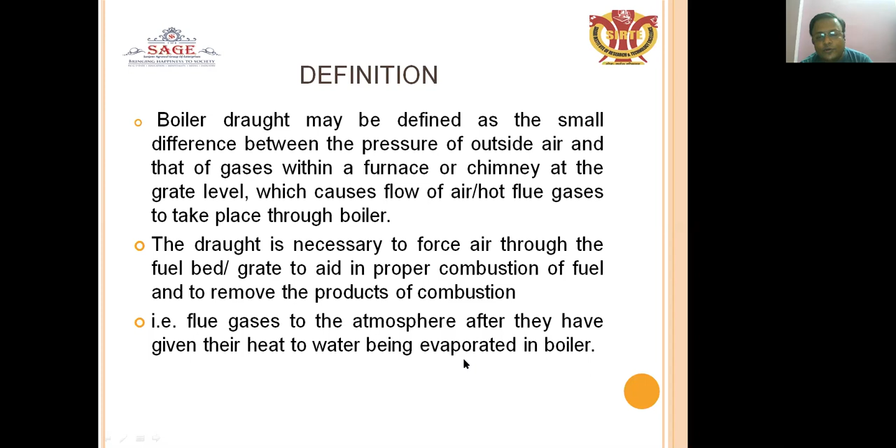Draught also provides velocity to the flue gases and increases the heat transfer coefficient in the boiler.

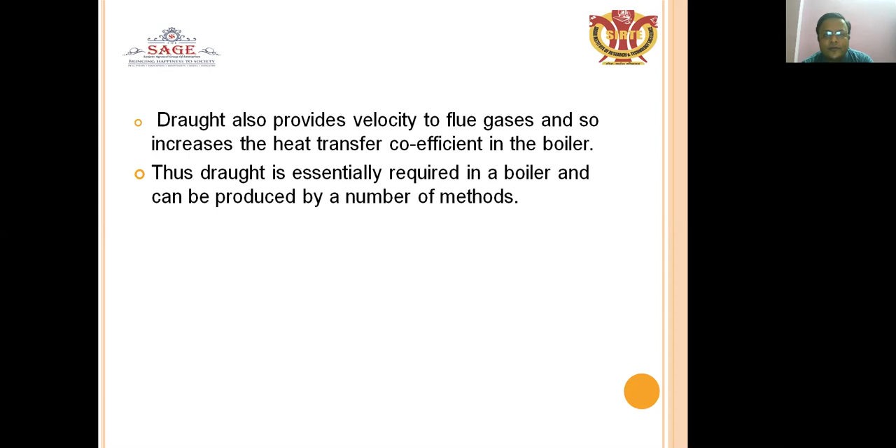Its classification is shown in a draught tree. There are basically two types. Natural draught is produced by the chimney, and artificial draught is produced by some external source. Artificial draught is further classified into steam jet draught and mechanical draught, which are used in a thermal power plant. Steam jet draught is produced by a steam jet, and mechanical draught is produced by a fan

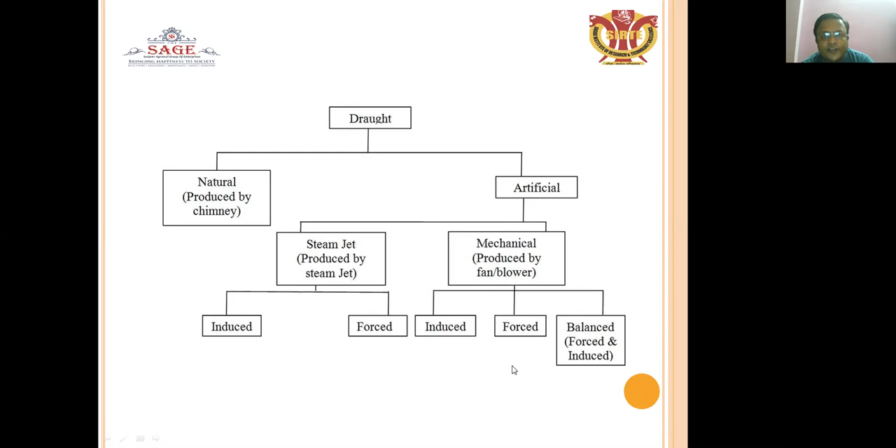or blower. The steam jet draught is divided into two categories: induced draught and forced draught. Whereas mechanical draught, produced by a fan or blower, is of three types: induced, forced, and balanced. Balanced draught is the combination of forced and induced draught. What is the meaning of natural draught?

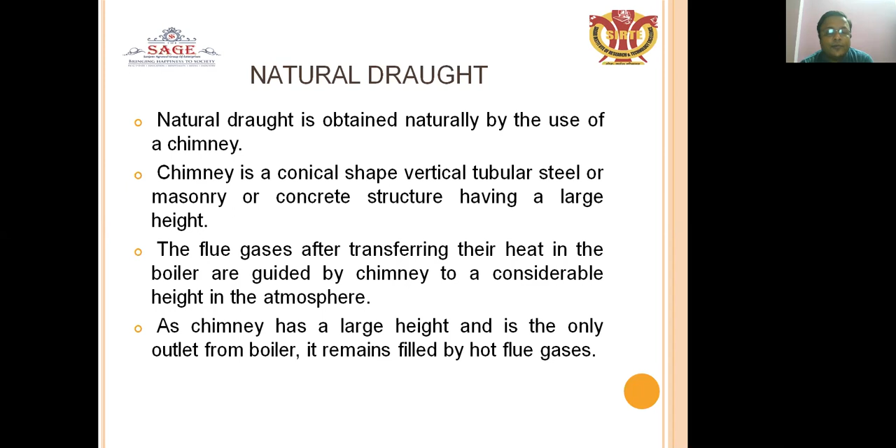So these exhaust gases, however, have given their heat to the water in the boiler are still hotter than the

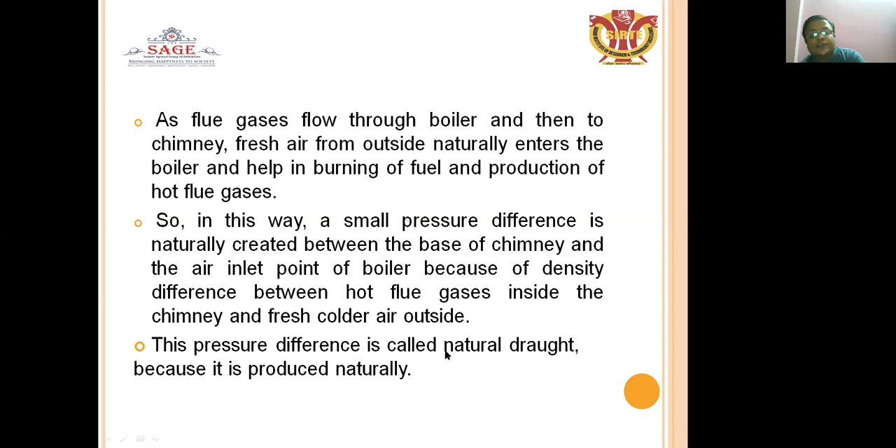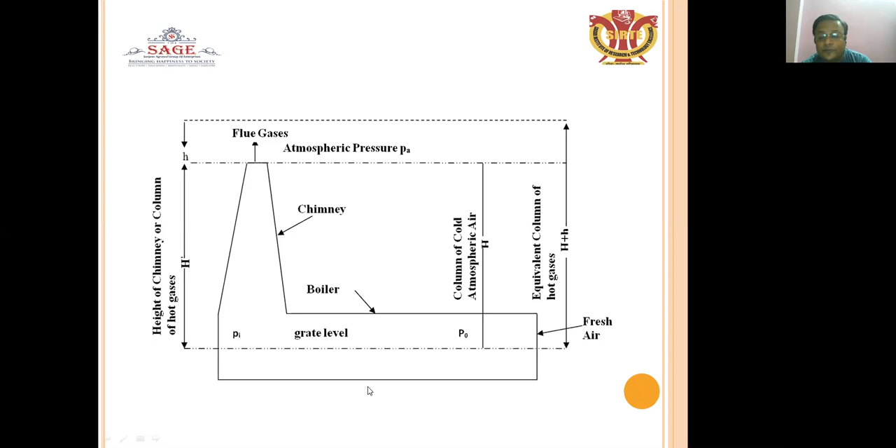Artificial draught: when the draught is not sufficient for escaping the gases from the chimney to the atmosphere, there will be a need of artificial draught, where some external force produced by a fan is required to move the gas from the chimney to the atmosphere. That is called artificial draught, in which category comes a mechanical fan or blower, or a steam jet itself.

In a modern commercial boiler, more value of the draught is required to increase the heat transfer coefficient and enhance the thermal efficiency.

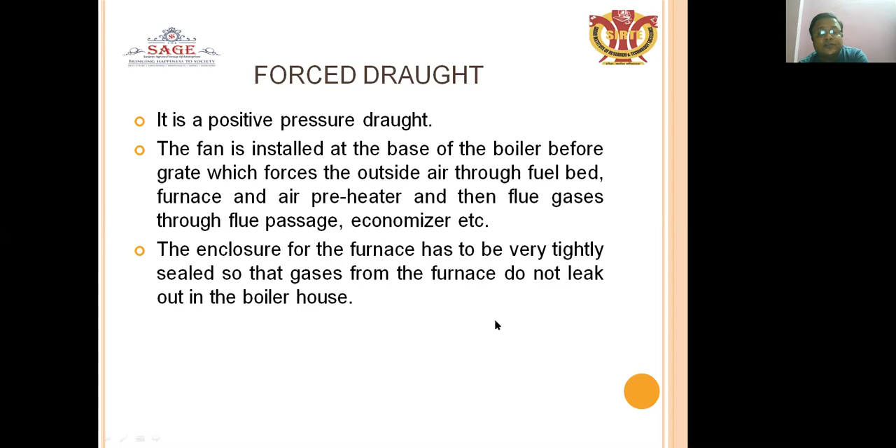So it will be helpful for the economizer also, that is the accessory of the boiler, and it will be helpful for the preheater, which helps preheat using the gases before they pass through the chimney. The enclosure for the furnace has to be very tightly sealed so that gases from the furnace do not leak into the boiler house. So this arrangement can be done by the forced draught fan.

In induced draught, in this system, the fan is installed below the chimney, or at the base of the chimney, which creates a partial vacuum in the furnace and the flue passages. For escaping of the gases, a fan will be needed because the gases carry a high amount of heat. That is the reason the gases will be lighter than the cold air.

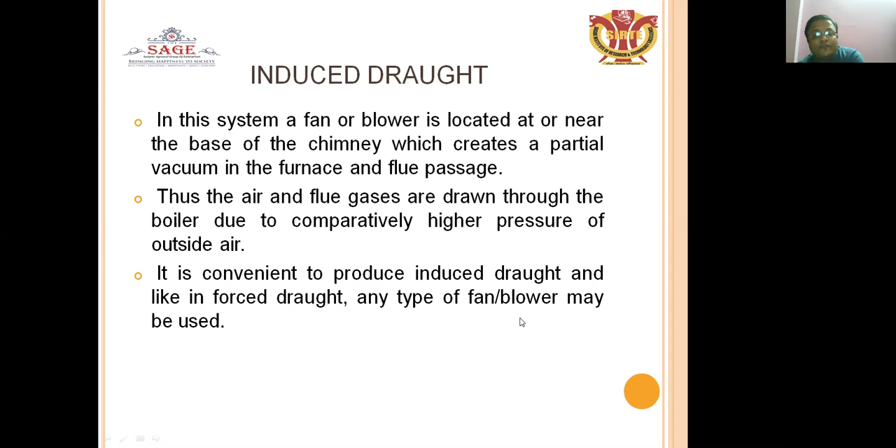The air and the flue gases are drawn through the boiler due to the comparatively higher pressure of the outside air. It is convenient to produce the induced draught, and like in forced draught, any type of fan or blower may be used. Balanced draught is a combination of the forced and induced draught.

Forced draught, which will be produced below or behind the boiler combustion chamber, and then the induced draught fan, which will be used at the base of the chimney, will produce the draught for escaping of the gases from the chimney base to the atmosphere. Depending on the type of fuel burned and the type of boiler, the fan or blower used may be of any type, radial or axial. It may be of radial shape or axial shape.

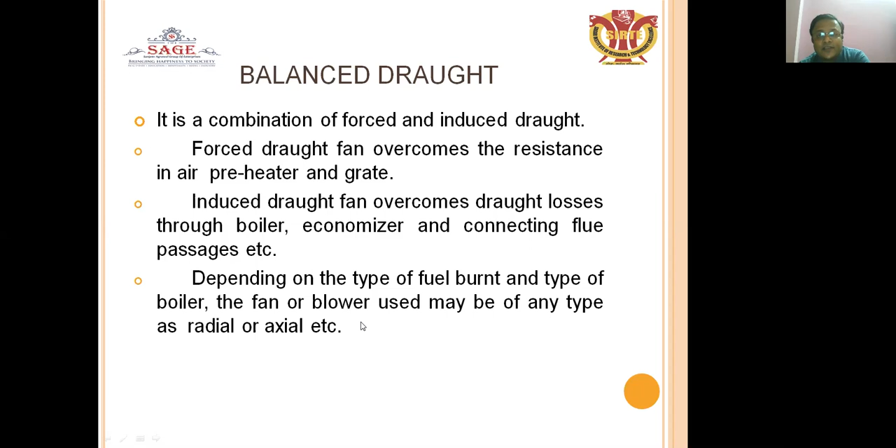What are the advantages of the mechanical draught?

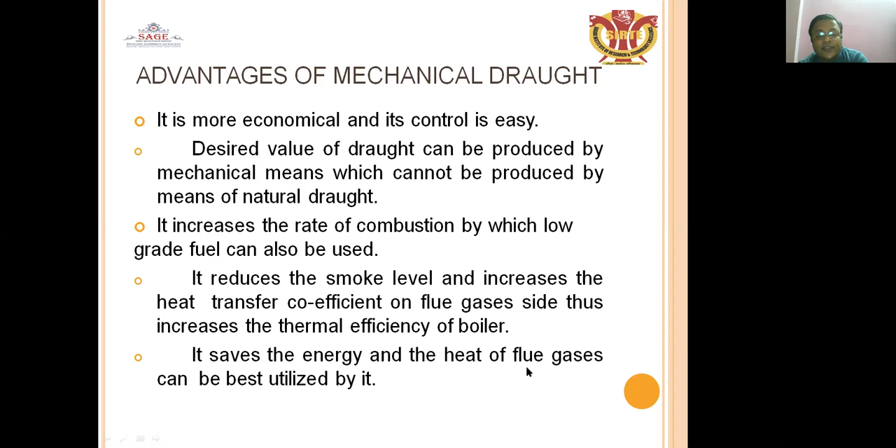Running cost is also high due to the requirement of electricity, but that is easily compensated by the saving in fuel consumption.

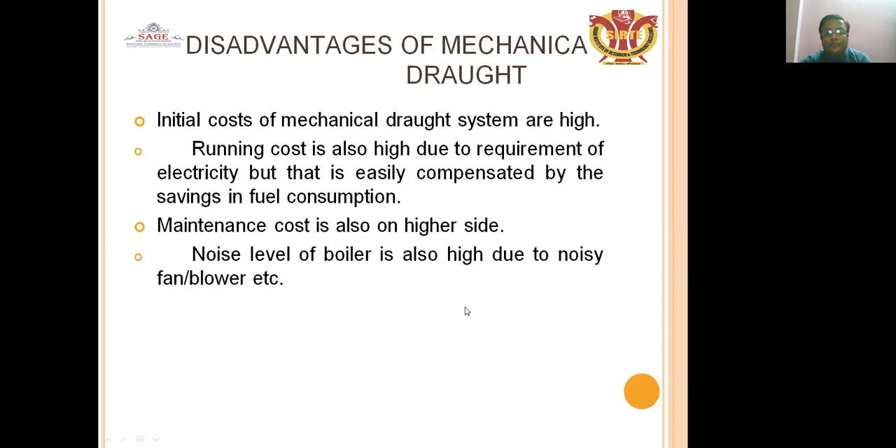Steam jet draught is a very simple and easy method of producing artificial draught without the need of an electric motor.

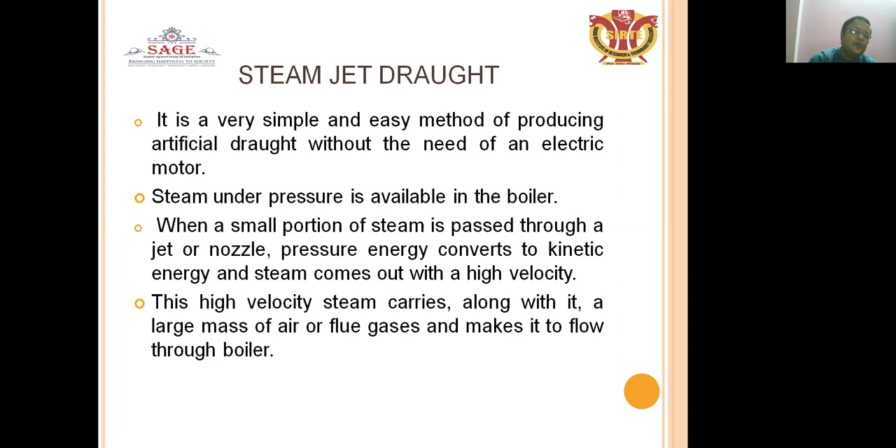Another mode of draught will be used, that is called steam jet draught, using steam of high force. The steam jet is directed towards a fixed direction and carries all its energy in kinetic form.

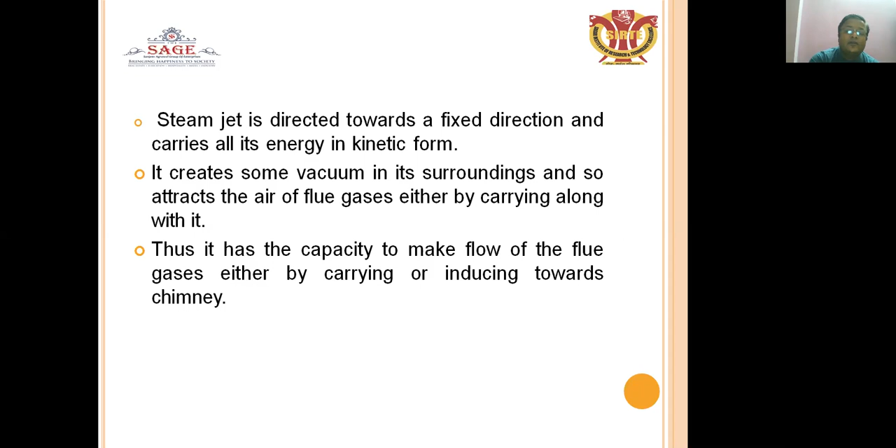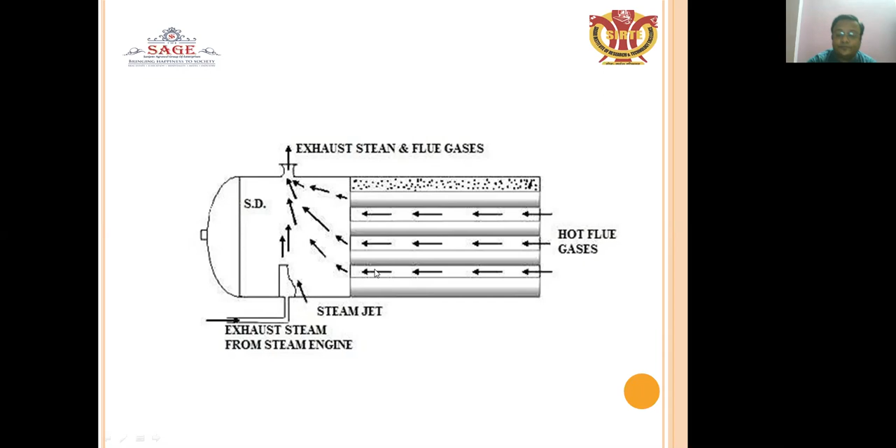What is a forced steam jet draught? When the steam does not have sufficient kinetic energy by natural means, there is a need of forceful steam to force out the escaping gases from the chimney to the atmosphere. Steam from the boiler, after being throttled to a gauge pressure of 1.5 to 2 bar, is supplied to the jet or nozzle installed in the ash pit. The steam emerging from the nozzle with great velocity draws air along the fuel bed, furnace, flue passages, and then to the chimney. Here the steam jet is forcing the air and flue gases to flow through the boiler, hence it is called forced steam jet draught.

Because natural steam jet draught is not sufficient to force out the gases to the atmosphere, there is a need for forced steam draught. There is a nozzle arrangement, and the great velocity draws air along with the fuel bed, furnace, flue passages, and then to the chimney.

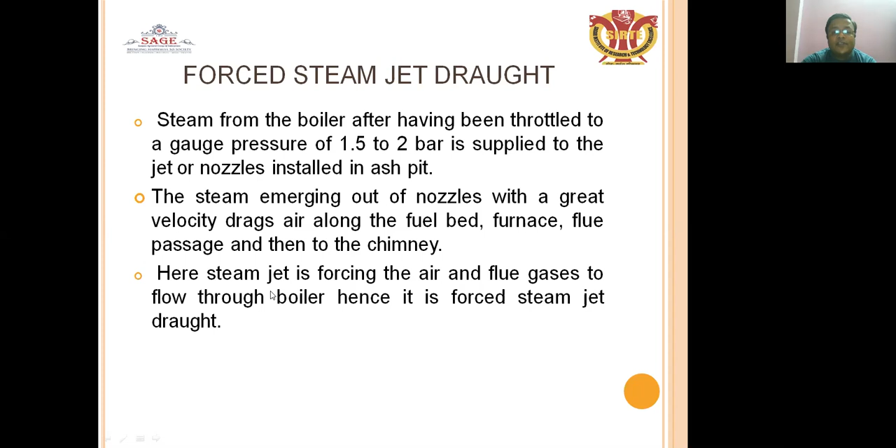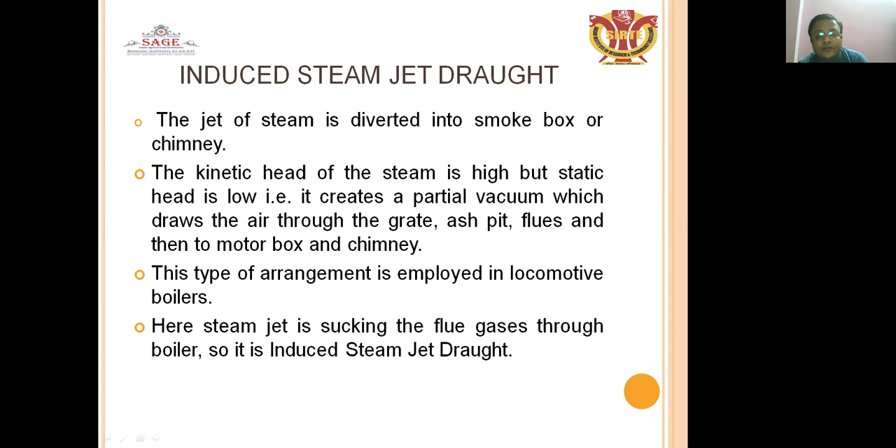What is induced steam jet draught? The jet of steam is diverted into the smoke box or chimney, which is called steam induced jet draught. The kinetic head of the steam is high but the static head is low. This creates a partial vacuum which draws the air through the grate, ash pit, flues, and then to the smoke box and chimney. This type of arrangement is employed in locomotive boilers. Here, the steam jet is sucking the flue gases through the boiler, so it is called the steam jet induced type of draught.

What are the advantages of this type of draught? It is quite simple and cheap. It has the capability of using low grade fuels. It occupies very less space. Initial cost is low, maintenance cost is low. Exhaust steam from the steam engine or turbine can be used easily in a steam jet draught.

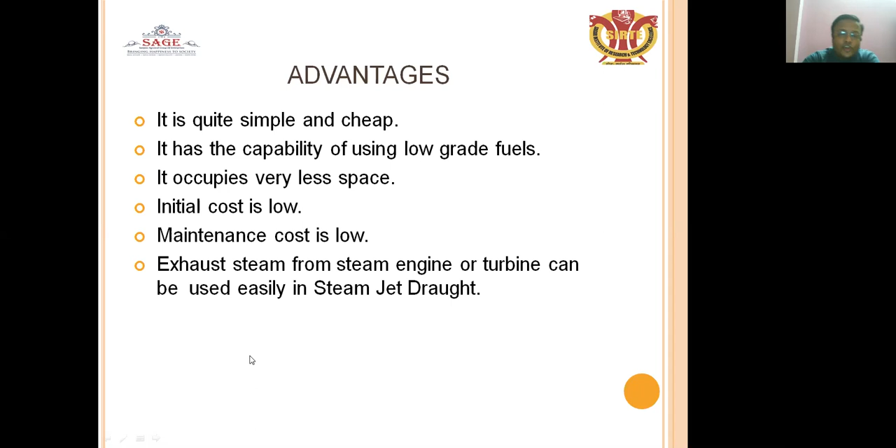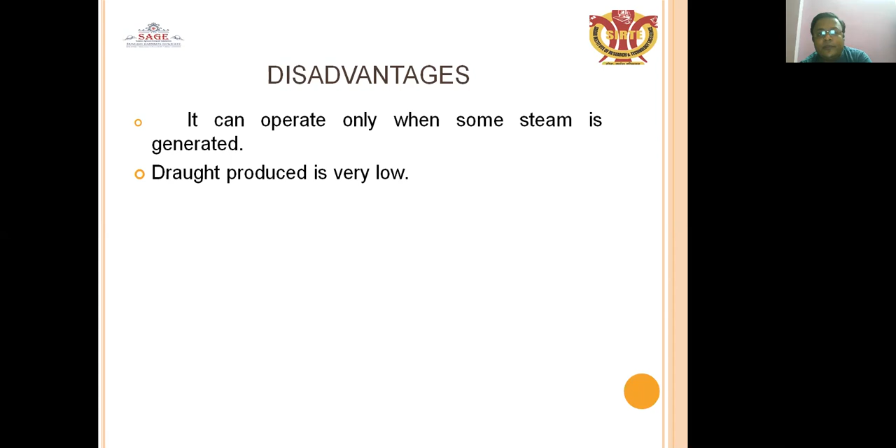What is the disadvantage? It can be operated only when steam is generated; that is the disadvantage of the steam jet draught. The draught produced is very low in quantity, due to which we can use this draught only to a limited extent.